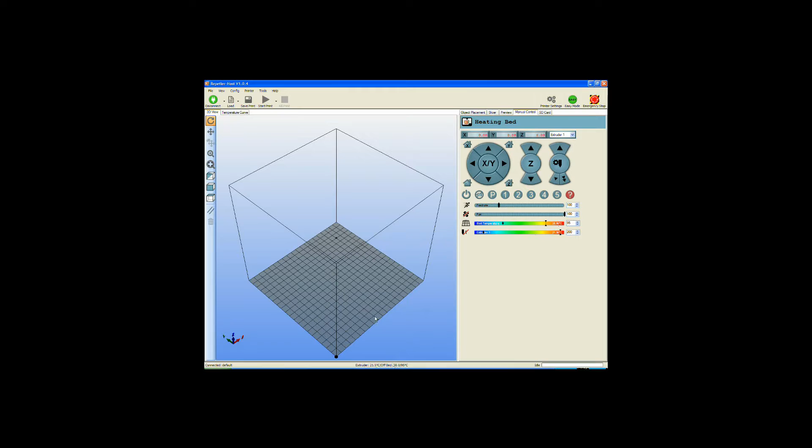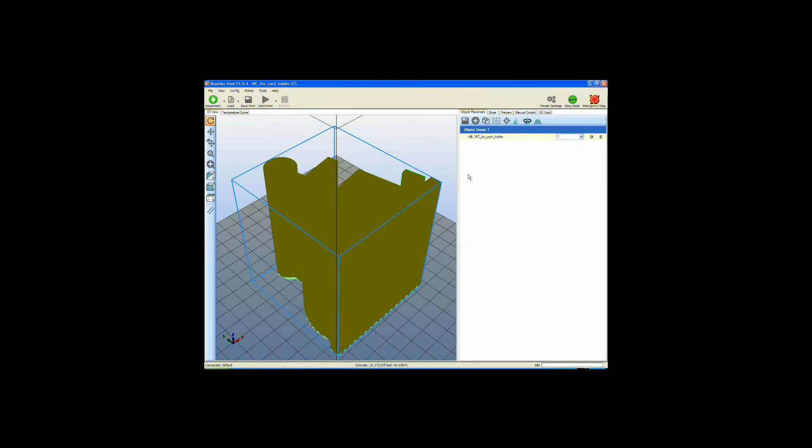The next thing I do is I'll go ahead and hit load and pull up the file that I want to print, which is a wheelchair business card holder. Make sure I get the right one. Got a couple different versions of some of these files. That'll pop in the file to be printed. In this case, it's already in the right position. Occasionally they'll come in and they'll be tipped on their side, and you take some thought on some prints on which side is best to print from. You can rotate around your view, but you can also rotate the object on the bed. Say around the x-axis, I could rotate 90 degrees.

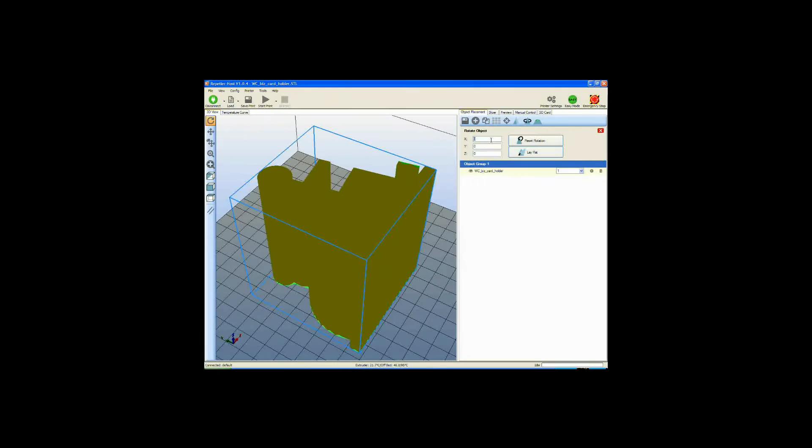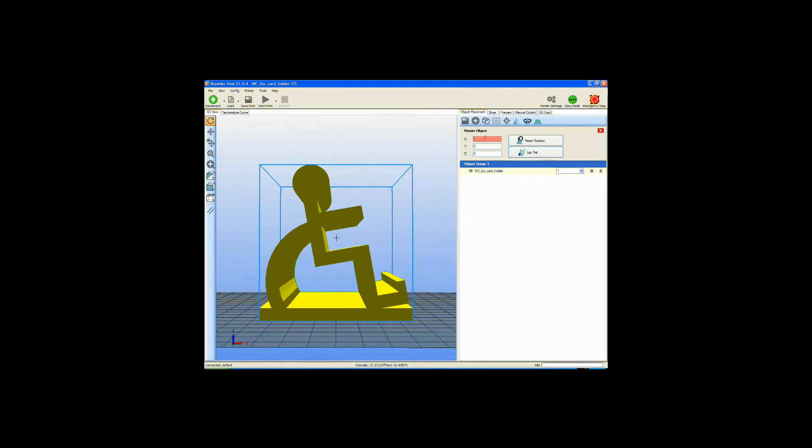The problem would be if I did print this configuration, there'd be a lot of support material generated. Actually, for this model, I won't be printing any support material, which is a big advantage. In order to print this way, this dark area is the bed. This area in the middle would all be filled with support material. Underneath the arms would be support material. Underneath the feet would be support material, which is really not ideal. So I won't rotate that at all. I'll rotate it back to the original configuration. And by printing it from the end, you end up with no support material because it's the same shape from bottom to top when you print.

So once that's in, I'll print in full scale. You can make copies. You can scale the object. You can cut them down. You can move them around. For this, I'm just going to print one object. Come over to my slicer program. I use this Slic3r. I'm on version 0.98. You have a couple options that you can run. This has just been the one that I've had the best luck with.

I'll show you the configuration here. This actually is a separate program from Repetier, so it has to pull up the separate program to do the slicing. And what this does is slices the layers. It basically analyzes your 3D object and cuts it at each layer and creates the G-code to be used to print it out. The slicer software here has got a lot of options.

In the print settings, I set my layer height to 0.35 millimeters. That's fairly coarse, but for most of what I do, that works. I do some perimeters to just get the extruder flowing. Do 3 solid layers on the bottom, 3 on the top to make sure the ends are sealed up. A couple of the other important things are the infill. Currently I'm on the 20 infill, which is what I'll actually print this at, because I want it pretty hollowed out on the inside to save material and keep it lightweight. So the fill density is 0.2 for 20%.

I choose to use a honeycomb pattern on this. You can do rectilinear and concentric. The honeycomb, for an object like this where there's some pretty big spaces inside, makes a nice solid, stiff structure without using too much material.

Top and bottom layers, I use concentric usually. It's not quite as nice or quite as strong as the rectilinear can be, but it looks prettier, so I tend to use that. This is infill every layer. I wouldn't want to skip layers. Solid infill every 12 layers, just to help make sure everything stays solid and stiff.

I'm filling at a 45-degree angle just because some of my lines are straight, horizontal, and vertical. That kicks things just a little. Sometimes I'll do 30 degrees. The solid infill threshold, this you have to play around with based on your individual part. On this one I'm running 30 millimeters squared. Basically any areas smaller than that will be solidly infilled, which will make sure it's strong. Again, you learn that just playing around.

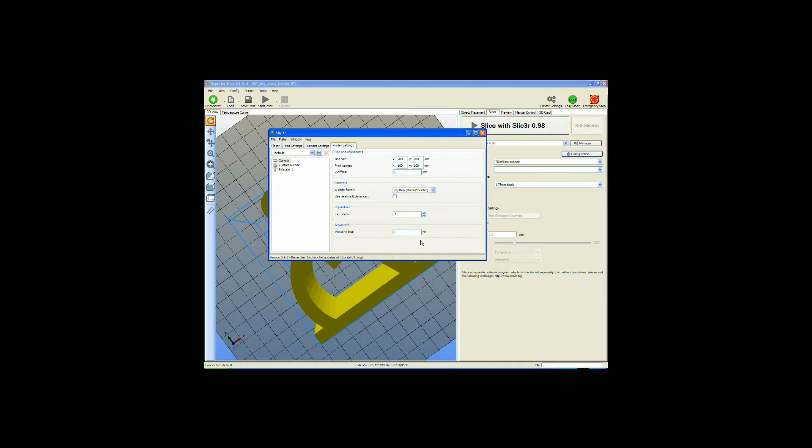So I go ahead and shut that off, and I'm actually making changes, so I'm gonna discard that. I'm going to choose to go with the 20 infill, which is a 20% infill that I was just showing you. And go ahead and hit slice with Slic3r. The size of the object and the complexity of its geometry will all factor into how long it takes to slice. In my experience, this part takes, I believe, a minute or two to slice.

You'll see the little progress bar will start extending out once it starts making some progress on it. And meanwhile, the bed just continues to get warmer and warmer. We're up to 84.3 degrees, and a lot of times by the time I'm done setting up the part and slicing it, it'll be ready to print. So I'll go ahead and check the start job after slicing is finished and let the computer continue to chug away here at the slicing. We'll throw this up on fast forward until we jump ahead to the finished sliced model, and then we'll show you how the print begins.

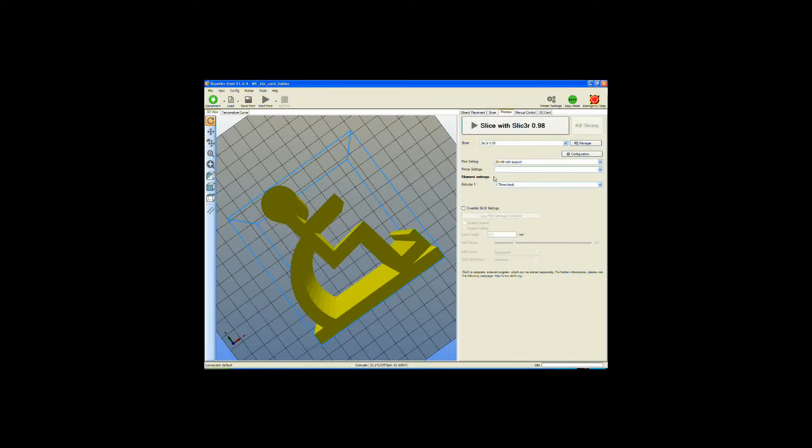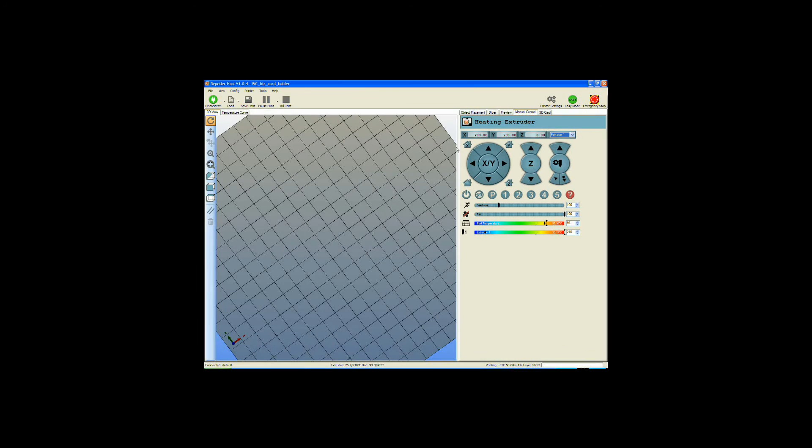So now the job has actually started, and you can see the options up top here have changed to kill print and pause print. If you have to adjust a kink in the filament or anything, you can pause the print. If you hit kill print, it stops the print, and you'll have to restart it from scratch, scraping off anything you've done. The preview tab here will give an idea of how long it's going to take. This is a 5-hour and 41-second print, 252 layers.

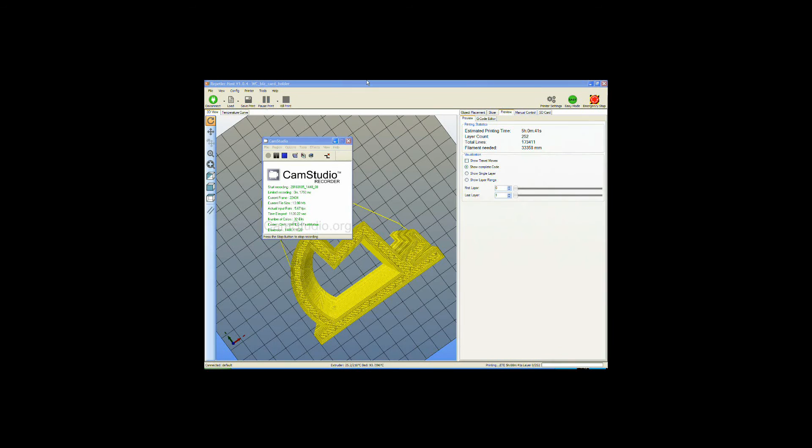My CamStudio popped up here. You can see the texture has changed here. This actually shows the path that the extruder will be taking. You can see a little of the honeycomb up here in the head area. You won't actually see that in the end. That's all internal, but you'll see it during the printing process. The little line around the outside is the skirt we talked about that gets the flow started.

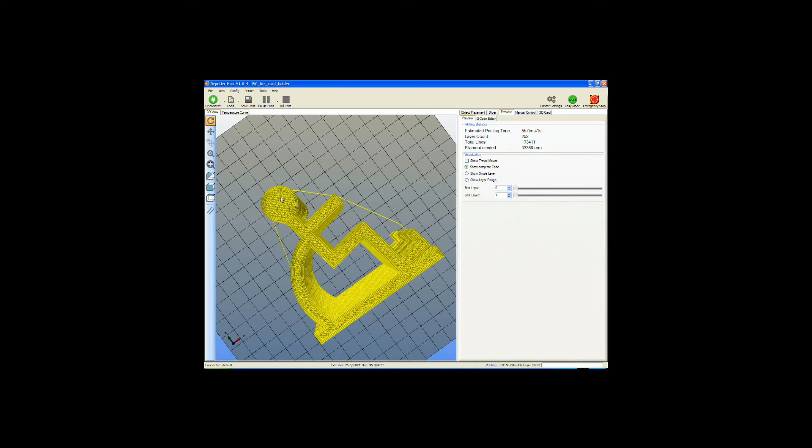We just hit 96 degrees, and now the print head moves out of the way. The print table starts to come up. I'm going to pop open the front door that I built, just slide out the paper towel that's in there, lay that to the side, and close the door back up to keep the heat inside. And now it will heat up the extruder itself, which is currently at 25 degrees Celsius. Once that reaches 210 Celsius, the print will begin.

I will go ahead and speed up the camera again here to jump to where the temperature gets up to 210, and then the print will begin, and we'll show you a couple layers at the beginning, and then kind of as the model prints up, how it all just moves.

The print platform moves down 0.35 millimeters per layer, whereas a lot of standard CNC machines will do the opposite, where the head itself will keep moving up or down. In this case, the head is on a fixed XY plane, and the table itself moves down a little with each layer. That's the more common way 3D printers, with additive manufacturing versus subtractive manufacturing, are set up. It's easier to move the platform than it is to move the head in the vertical direction.

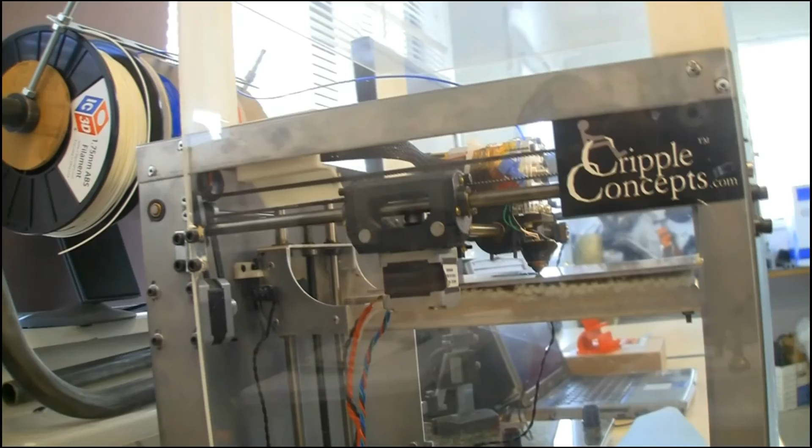So the first layer has begun. This first time around is just the skirt material, and this just gets the filament flowing real well, gets any excess off the end of the extruder that was dangling, and gets you a nice clean start. So this first layer is a nice solid layer that really sticks well to the bed.

I picked a nice long print to show off today, so once this first layer gets going, we'll do a little fast forwarding so you can see the layers as they happen, and then we'll try to get you a shot of what the finished part looks like.

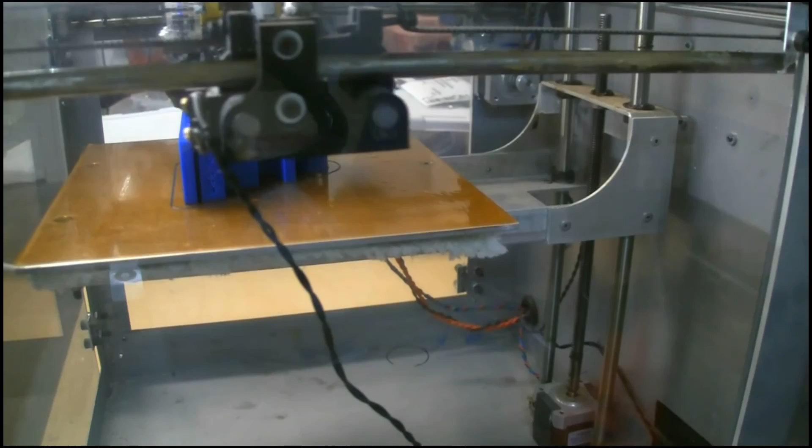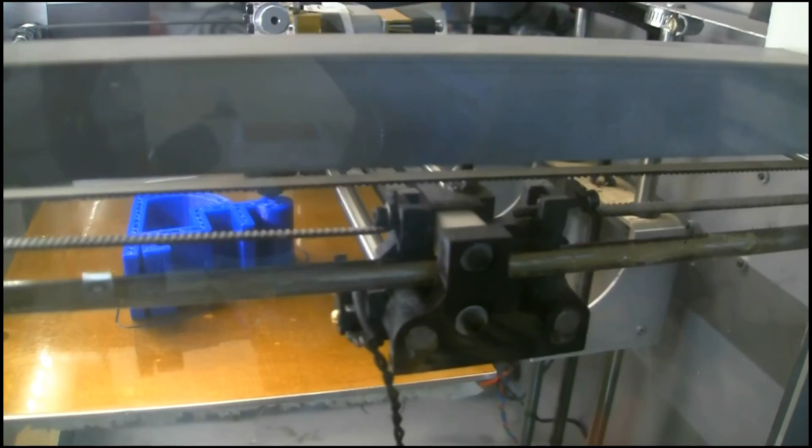Okay, we're about 2 hours or so into this 5-hour print. Just wanted to show everybody what the honeycomb pattern looked like on the internal layers. You can kind of see the gaps in there. That's actually all laid out in a honeycomb pattern. Kind of hard to get a shot. That's probably the best we're going to get.

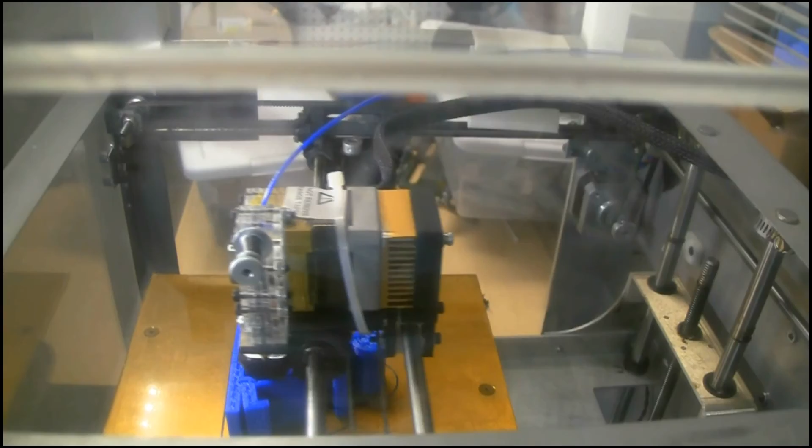And then, as I showed earlier, every 12 layers it does a solid layer, which makes it nice and stiff and solid. And for this particular thing, it's just a business card holder. That's not a real big deal, but for other objects, that's a whole lot more important.

You can actually see it's not lifting at all from the surface of the Kapton tape there. That orange stuff is called Kapton tape. That helps it adhere. It's not sticky or anything. It just must be a porous surface. That's what most of the 3D printer manufacturers send with it or recommend.

Sometimes you'll see on the edges it'll start lifting off, and that's when you start to get a little nervous that it's going to lift. But this one's staying nice and solid. Temperature's been staying consistent here in the shop.

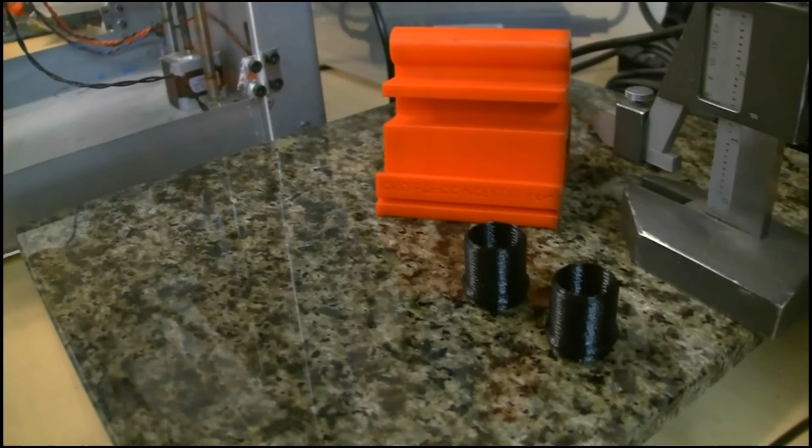I'm not going to bother showing you the end of this because it's basically what you're seeing here in front of me. This red one is a previously printed model. Those two black things are bungs for the USB chargers that we sell. They're just done in black. I'm going to turn the finished model here a little bit so you can kind of see what the end product looks like. That's ultimately what we're going to end up with here with the blue one.

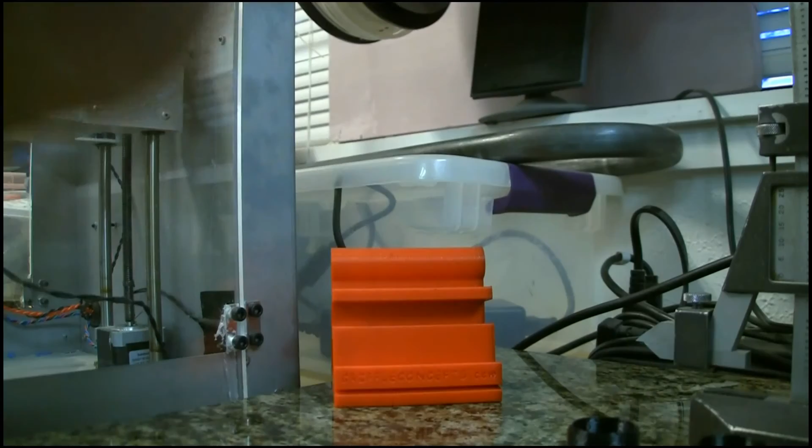You can see we actually have crippleconcepts.com right into the little fella's feet there. I don't know how well you can see on the camera. There it goes. Kind of nice as a little advertisement, but when they take 5 hours, you don't print a whole lot of these.

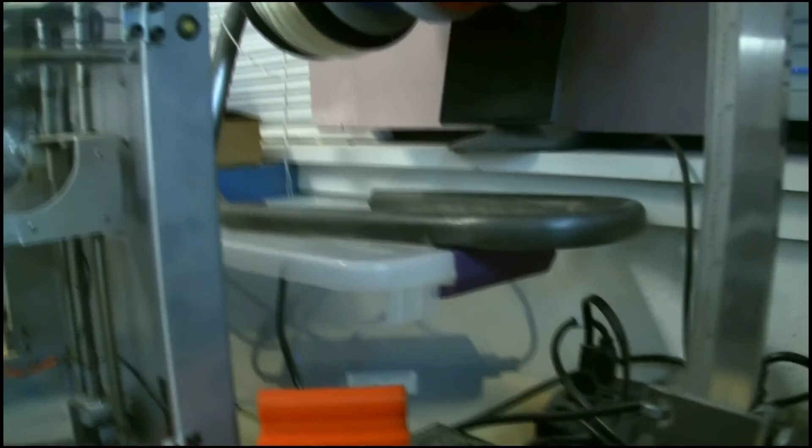I also want to show you the material rack that I built. The Solidoodle comes with just a plastic PVC single roll of filament rack on the back that I thought was quite terrible. So having a nice tubing bender, I bent this nice one up here. It holds 4 rolls of filament, and then there's a guide. If I can get an angle here, the guide lets each filament come through separately, keeps them from tangling up or anything.

And then in between each roll, there are pieces of plywood. You can see the one on the end here. I have them as spacers. That way, when, say, the blue roll is unreeling, it doesn't unreel the red reel, and vice versa. This has worked out quite well. It keeps it from tangling, makes it real easy for me to independently change the filaments. So, yeah, I recommend building some kind of a better filament guide.

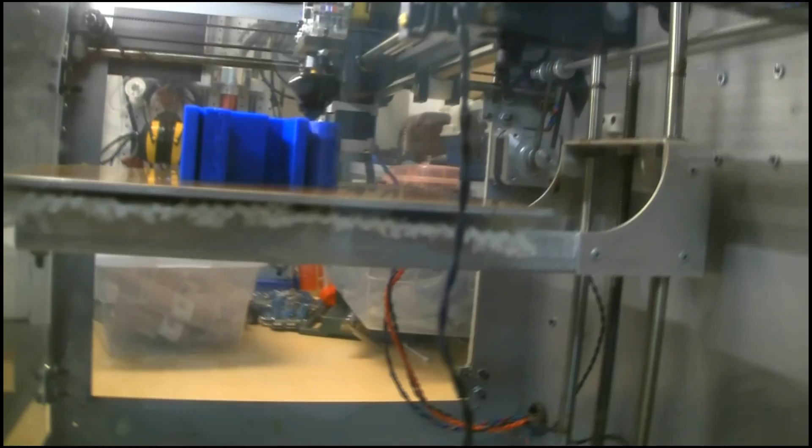So, yeah, we'll call that a video. We'll keep printing here for the next few hours. I'm going to go in and have some dinner and come back and hopefully have a finished print in a couple hours.